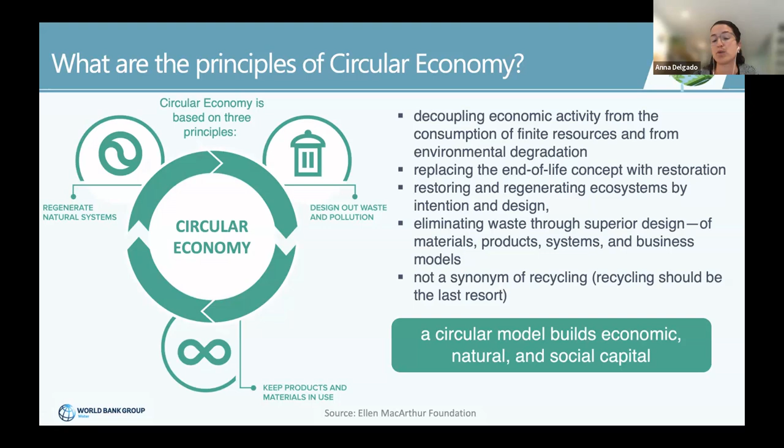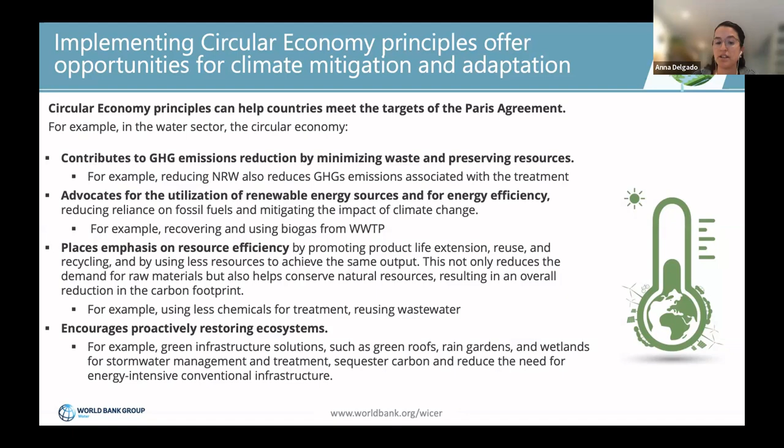There's a lot of text here, but I wanted to highlight that the principles of circular economy are also in line with climate goals and offer opportunity for climate mitigation and adaptation. One example is reducing non-revenue water, which improves resource efficiency and also helps reduce energy needs and therefore greenhouse gas emissions.

Circular economy, we believe, needs to be applied also in the water sector. We can be inspired by the circularity of water in nature. And we think we need to include two important key issues: resilience, and also being inclusive.

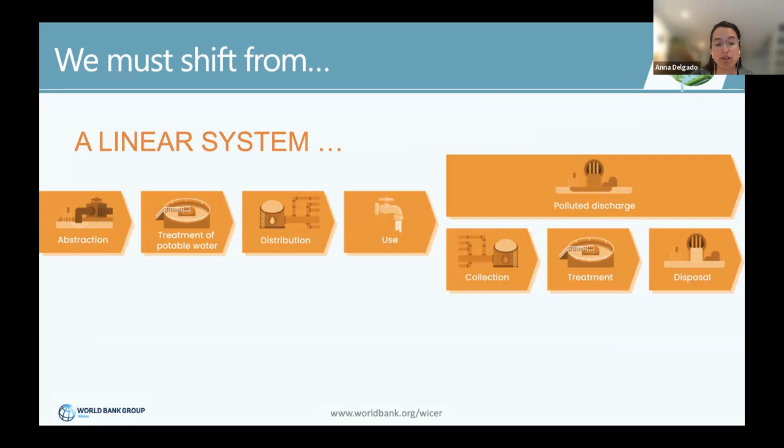As we were having more and more demand from countries to implement those principles, our purpose was to have our own common understanding of how circular principles can be applied in the water sector, and to have a clear framework when supporting countries implement those principles.

The first requisite for us is to value and use to its fullest potential what we already have. This should be a key principle of circular economy. The existing infrastructure can be retrofitted or optimized to increase treatment capacity, provide additional services, or maximize service delivery at a fraction of the cost of new infrastructure.

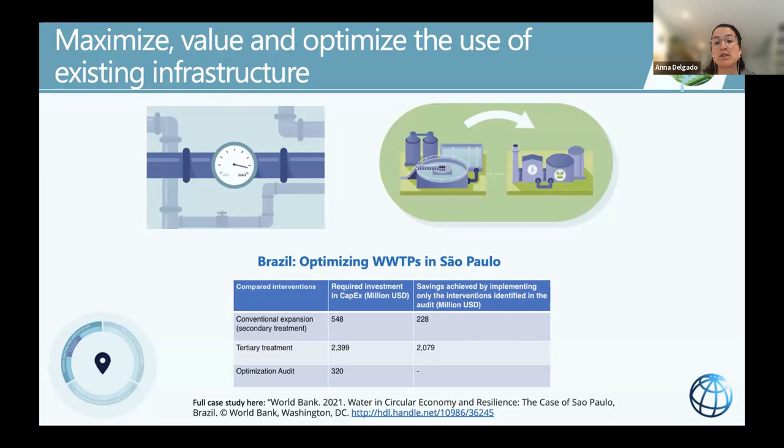I've included a table from a very interesting case in Sao Paulo, also with some support from the World Bank. The utility, instead of investing in tertiary treatment to meet new quality standards, was able to optimize the existing treatment processes individually to increase treatment capacity and quality levels, resulting in huge savings for the utility.

Then key to circular economy are also operations optimized for efficiency, reliability, and performance. It makes no sense, especially in many of the countries we're working in, to start reusing and spend a lot of money on reusing wastewater if we're losing most of it through the pipe. So reducing non-revenue water should be one of the key issues if we want to become circular.

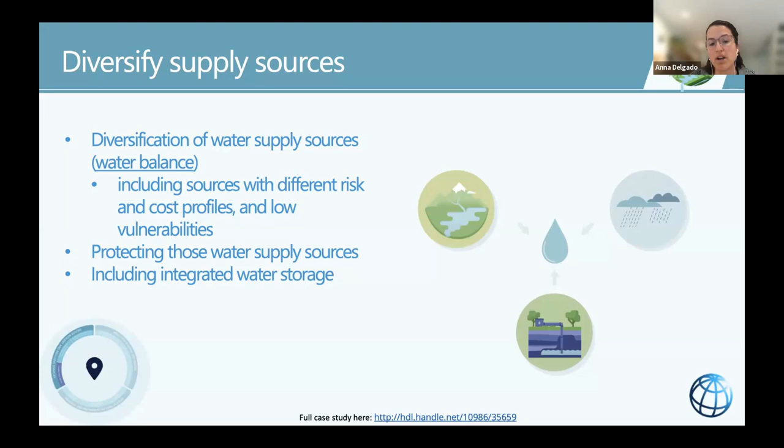We also need to diversify water supply sources, including a portfolio of sources with different risk and cost profiles and low vulnerability to shocks and stresses. That way we can also hedge against risks such as climate risks. And of course, reuse of wastewater and other unconventional sources must be part of this water balance.

Resources can be recovered over the entire water cycle in the form of water, energy, nutrients, and other materials. Ideally, all these recovered resources can provide an additional revenue stream for the utility or reduce operations and maintenance costs, helping the utility become more financially and environmentally sustainable. Resource recovery, as we will see later, can be done at different scales and may include centralized and decentralized solutions. The right solution really needs to depend on the local context.

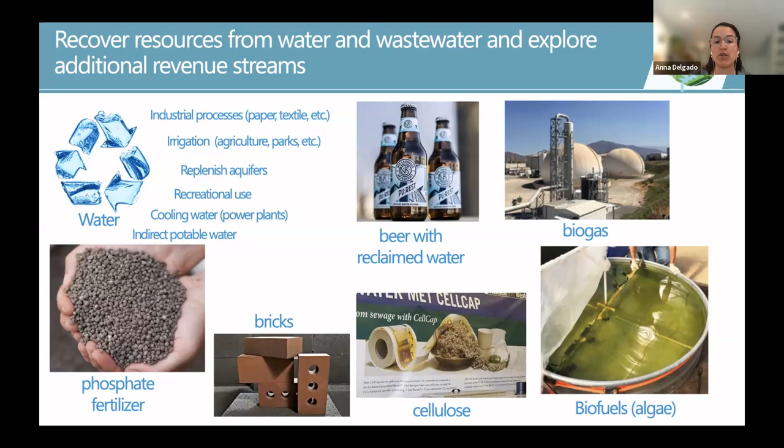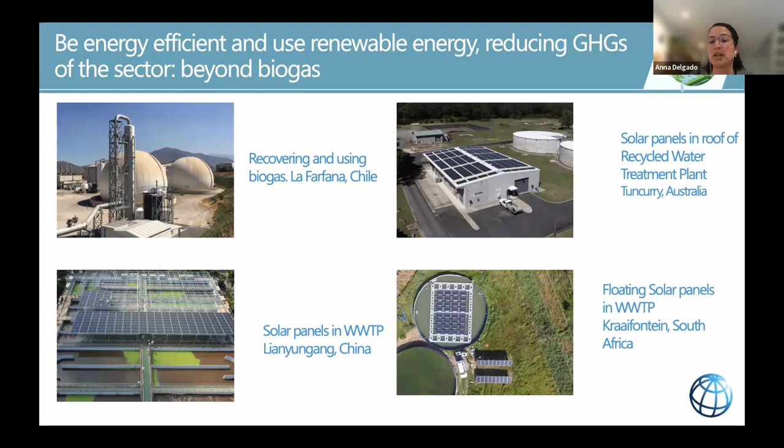Because energy is often the costliest component of water supply and sanitation operating cost, energy efficiency and renewable energy serve both to reduce emissions and also to strengthen the financial performance of the utility. And when we talk about circularity in water, many people think about biogas, but we need to think beyond that. I have included here some examples of solar, but there are many more utilities exploring solar or wind to reduce their climate footprint and to reduce energy costs.

One key issue of becoming circular is also to proactively preserve and regenerate natural systems. For example, we can use nature-based solutions such as constructed wetlands as part of the wastewater treatment. And it is also crucial to manage and recharge our precious aquifers that can also help us adapt to climate change.

There's always key cross-cutting issues that are important factors in the successful adoption of becoming circular. For example, it's very important to manage water demand and decrease water use where possible and become more water efficient. We need to create the right policy, institutional, and regulatory environment to be able to promote those type of solutions. Stakeholder engagement is also key in order to ensure social acceptability, especially when we're talking about reuse.

We believe that implementing circular economy principles also makes economic and financial sense, because as we've documented through our projects and other case studies, we can create additional revenue streams, we can reduce operation and maintenance costs, which then offer a better return on investment. This also can help bring or create innovative business models and bring the private sector to manage those new businesses. And there's also potential to tap into other sectors' financing, such as green or climate bonds, if we're recovering biogas, for example, or environmental impact bonds when we talk about nature-based solutions.

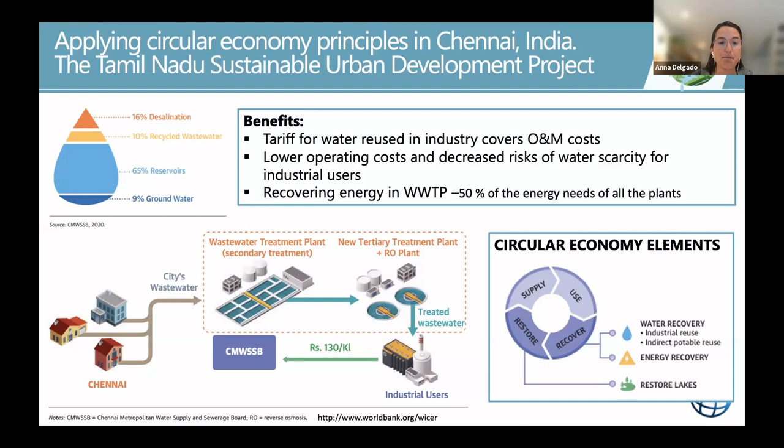And these are also other examples of projects that have circular economy components, and we are receiving more and more requests to implement circular economy principles in water. As part of our initiative, we're also documenting relevant case studies from around the world, which you can find in the websites shown here. And these case studies have also informed the development of our framework.

In the successful case studies, also they leverage the resources recovered to create additional revenue streams, and that way they would make the investment financially sustainable. And finally, at the same time, there always needs to be parallel investment to improve the efficiency of operations of the utility in general.

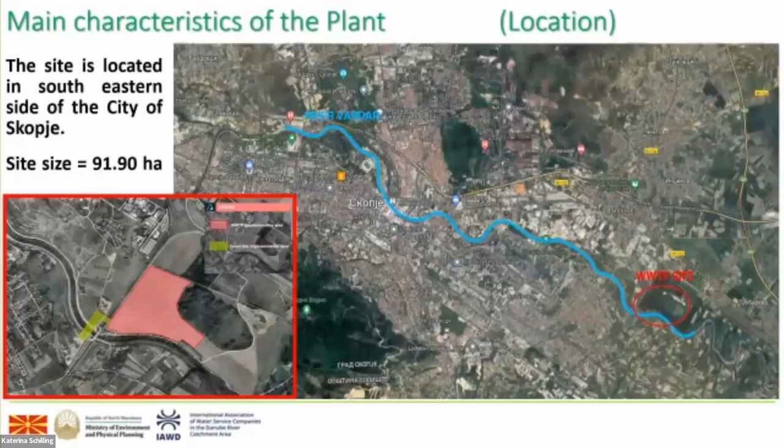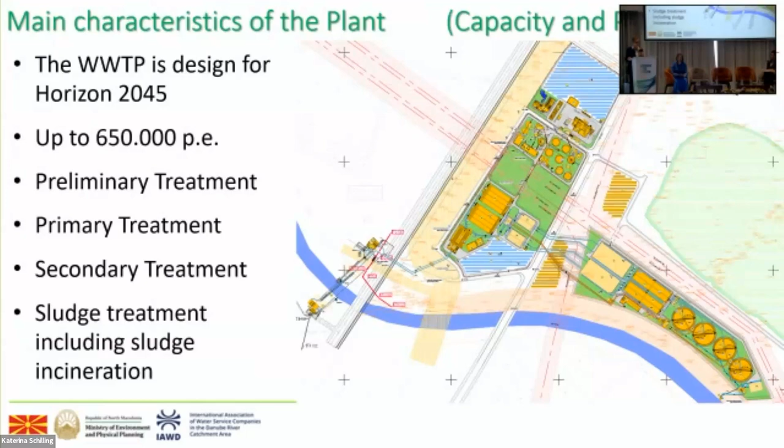Going further, those are the main characteristics of the plant. The horizon is 2045, for 650,000 people equivalent. So we have preliminary treatment, primary treatment, secondary treatment, and at the end, sludge treatment in the incinerator.

So what are the objectives which should be required? What is very important is that our wastewater treatment plant is designed to work in regimes, which means 33% at the beginning. To be honest, we do not have the total load now, and at the end it should be covered 100% of the designed loads.

I want to mention that before constructing the wastewater treatment plant, City of Skopje public enterprise did two amazing jobs. They were financed or granted by EBRD. So we did an inflow infiltration study, performing it for 1 year, and we really gained very interesting figures.

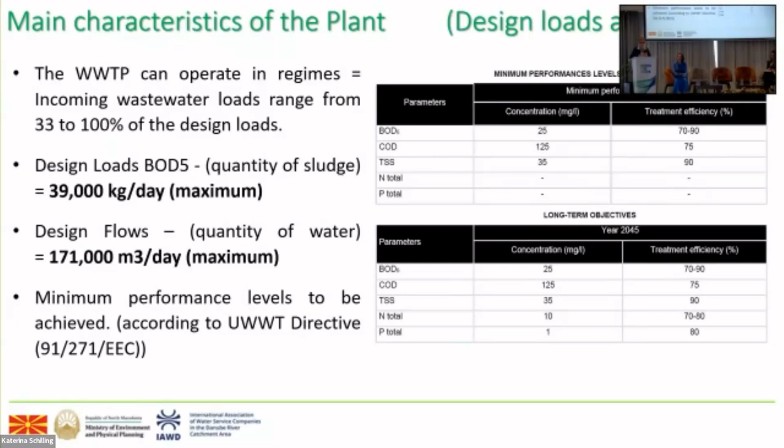But for long-term objectives, we are planning as well to go on to tertiary treatment, so removal of nitrogen and phosphorus of almost 70 to 80%, which is a high number to be set, but I really believe in the company which will construct the wastewater treatment plant, so we will meet the objectives.

Speaking about the numbers and figures, I want to mention that those are already projected numbers. We are still in the phase of implementation. We will have 3 years of construction plus 2 years defect notification period.

We are happy to say it's usually 1 year, but with our efforts we succeeded in gaining 2 years. So we will see what we will set, and whether those objectives will be met. But once again, I hope that we will do it.

So now a little bit focused on the sustainability of the wastewater treatment plant, which we as promoters are really very proud of. At the end, you will see that the wastewater treatment plant Skopje is planned to be 100% sustainable, which means it will cycle its own energy for use. So we'll produce the energy, use the energy, and at the end treat the sludge.

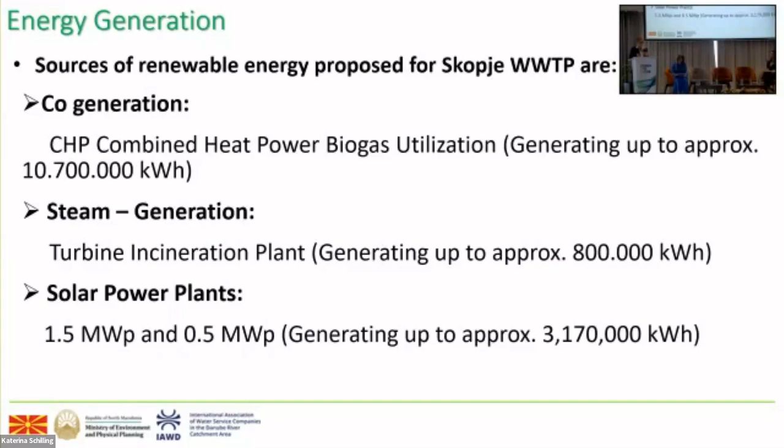Okay, so we will have 3 sources for energy: combined heat and power biogas utilization, which will produce per year almost 10 million kilowatt hours per year; and steam generation, which will produce almost 800,000 kilowatt hours.

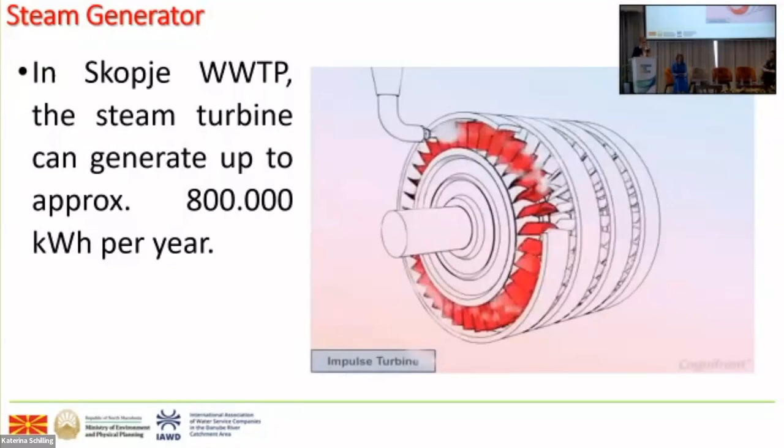And solar panels, which are on an area of almost 9,000 square meters, will produce approximately 3.2 million kilowatt hours per year.

Speaking about summary energy production, if we account the production of the heating power as 10.671 million, production of the steam turbine as 3.1 million, and production of the solar plant as 762,000 kilowatt hours per year, in total it is almost 15 million kilowatt hours per year.

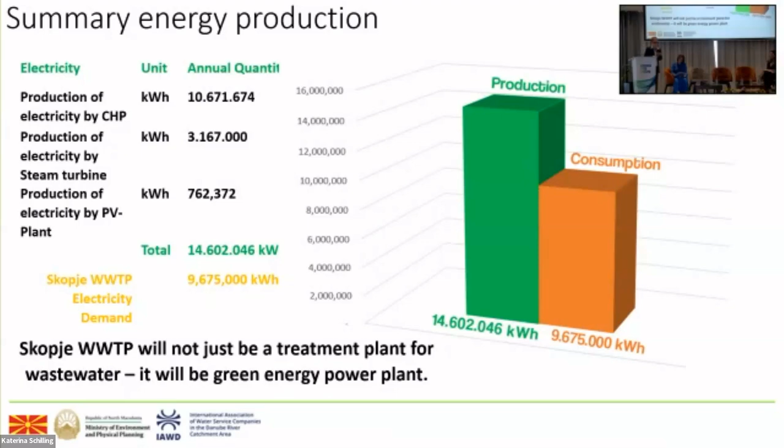But Skopje wastewater treatment plant's demand is almost 10 million kilowatt hours per year, which means that Skopje will not just be a treatment plant for wastewater, it will be a green energy power plant.

I want to mention that the incinerator is really unique in our region, because at the beginning, since there will not be so much sludge to treat, it could be a regional incinerator, which would be another source of funds for the public utility. I think we will work a little on environmental law regarding transport of sludge, so we can become a regional center for incinerating sludge.

What is very important is that at the end, the ash from the sludge is not thrown on the land, but is used as well. It can be used in construction materials like cement and concrete production, in road construction for asphalt and road base, as a soil amendment and fertilizer, and in the end, it can be used for metal recovery.

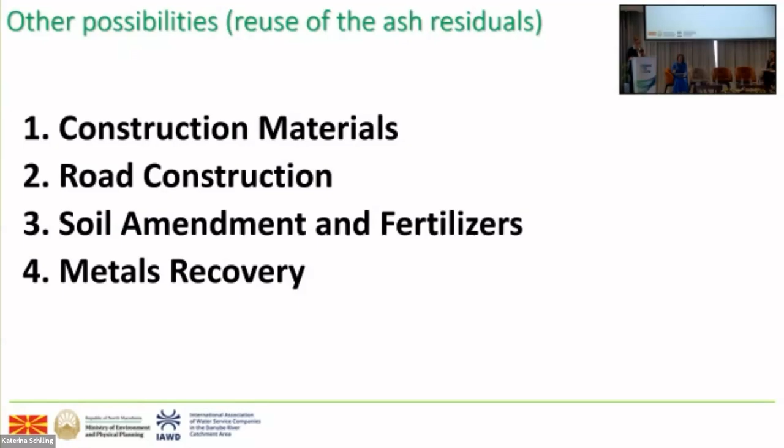So we will use the ash. We will not throw it away, even the sludge, we will not throw it on the land. So we will have a really sustainable, very efficient wastewater plant, which is very innovative, high-tech, and a green asset.

And at the end, I want to thank a lot, first, the government which succeeded in gaining the loan, the banks who were very supportive during the whole process, WBIF, and the EU for getting us the grant.

I want to thank a lot the young professionals, my team in PIU, who are very enthusiastic and supportive. Many of them during the process had their master thesis on the wastewater treatment plant, which is really amazing. I'm proud of them.

Thanks to all stakeholders. Even though sometimes we had difficulties during negotiations and coordination, I believe we will receive a really good project. Thank you.

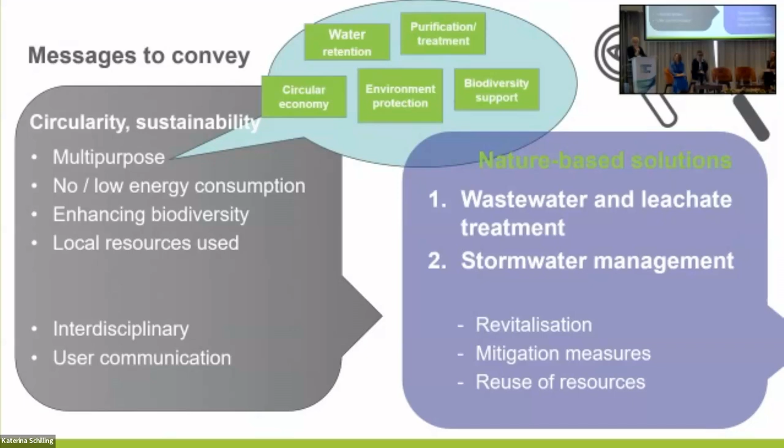Starting with constructed wetlands, mentioned already today: for those who don't know the procedure, a constructed wetland for wastewater treatment is a simple operation. Wastewater coming from, for example, a village is collected in a sedimentation tank and then runs through the substrate, through different forms of gravel, through the roots of plants, and in the end exits the system purified. The substrate serves as filtration and adsorption of pollutants, acting as a base for the plants we are planting and a surface for microorganisms, which, like in conventional wastewater treatment plants, are the main source of treatment.

Plants can be different varieties, usually the local varieties, and there are areas for microorganisms, and they also induce additional oxygen to speed up the process.

The solution is useful for entire villages. This is one example for a village of 500 population units, or up to almost 2,000 population units, and of course bigger if the area is available. So this is an area-intensive technology.

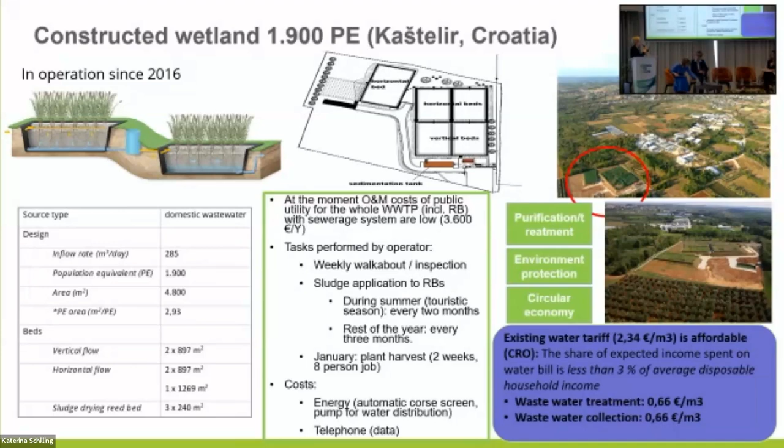On resource efficiency, I would like to point out that water reuse started in 2022. There was a huge drought in the region. The wastewater treatment plant has vines and orchards around it, so this water was already suitable to reuse directly from the collecting tank.

The sludge reuse is also part of the system, so this is a resource-efficient place, and the resource loop is present. All the sludge is collected in the sludge drying reed bed. This is a little bit different than a constructed wetland, but it's placed here too.

It's just one small reed bed. Initially there were 3 planned, but only one was realized because it's a Mediterranean climate, and it works really well with just one. In the end, we hope that when the sludge drying reed bed is filled, this material will be reused in agriculture. If not, other resource-efficient solutions will be found.

I also mentioned that biomass is harvested every year. This is a necessary process, and it is reused in agriculture after it is composted.

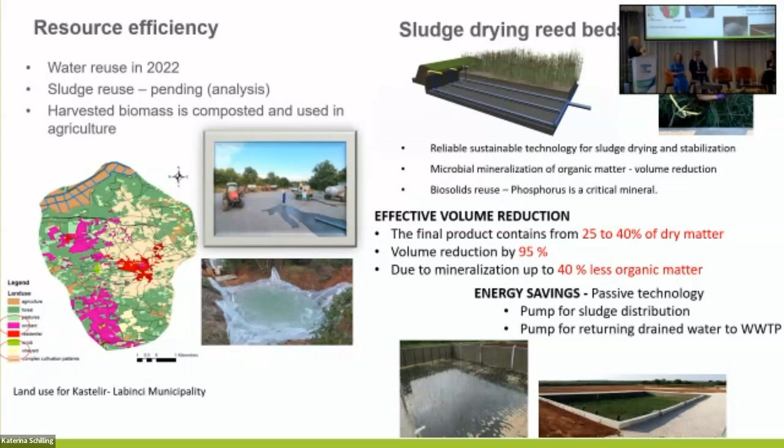Treatment wetlands in the Western Balkan region, as far as we can gather, are increasingly in demand. For example, in Croatia there are currently a lot of sludge drying reed beds being placed alongside conventional methods of wastewater treatment. This will enable the country to actually think about a sludge reuse strategy in the following years, and it will buy them at least 10 or more years of time. But these sludge drying reed beds are reusable even after this first filling, and reusing the material will be done.

Also in Montenegro, there are several locations where either a constructed wetland, sludge drying reed bed, or leachate treatment is performed using nature-based solutions, because they have many protected areas. These locations are next to rivers and lakes, and this is why the decision to use this technology was made.

There are also some locations in North Macedonia, not just in Skopje but also some smaller points we're happy with. This is a combination of a constructed wetland and sludge drying reed beds, so we are tackling all the pollution sources in one spot.

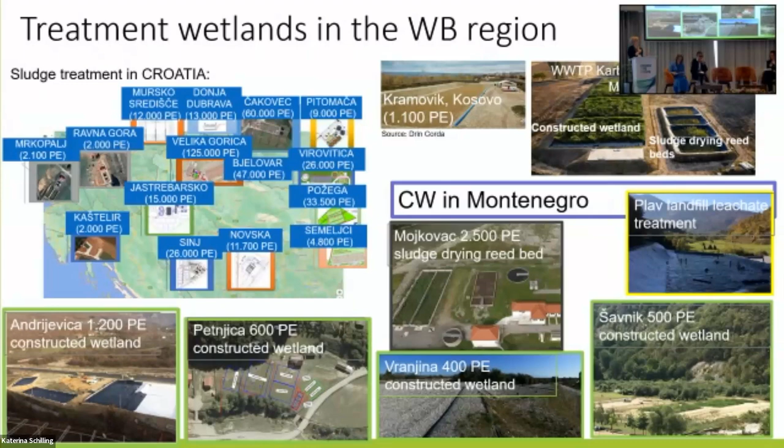And even in Kosovo, things are moving well. This is the first constructed wetland from Kosovo. It's not from our design, but I'm mentioning it nevertheless. So it's a known technology.

Nature-based solutions are quite flexible, and there are many solutions available. There's quite a lot of information about that on the internet. I'm pointing out one latest website where they present all the different solutions according to the pollution load, the surface you have, the availability of area, geography, and pollution loads. So the solutions can really vary, but you need in the end a skilled designer to design the solutions, because the devil really is in the details, like in any case.

We can have really different open areas, closed areas, a French system combining sludge and wastewater treatment in one basin, etc. I'm mentioning also the zero leachate treatment. This will consume a lot of area, but nevertheless it will enable the business model of charging for the treatment of wastewater and also producing biomass. This is a solution quite known in Scandinavia and other developing countries like India, for example.

This is a case I would like to present also from Slovenia. We started like 30 years ago, and this was one of the first locations of wastewater treatment for a village with a population of 250 initially. But during the years, population grew. This became a protected area.

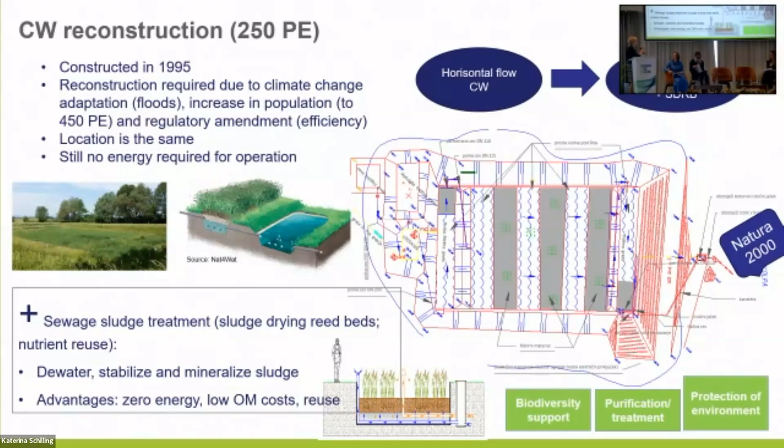And there is a Natura 2000 site right next to this, so this increased efficiency will also be observed there. So we are managing not just purification and treatment, but also protection of the environment and biodiversity support.

Stormwater management: some parts of the process of wastewater treatment in constructed wetlands can also be used in other locations and for other purposes, like stormwater management. This is a case of rain gardens in Ljubljana. Urban areas are particularly affected because of climate change. There will be a lot of heavy rains during the summer, and all this water has to be managed in a way. A rain garden is like a natural basin, a vertical filter, and plants will be used to support biodiversity and also to retain water during the summer to cool the area, etc.

This is the case that we are working on. There will be two rain gardens. One will be for purifying the water from a parking area nearby, and the other will be to retain, detain, and purify stormwater from the roof.

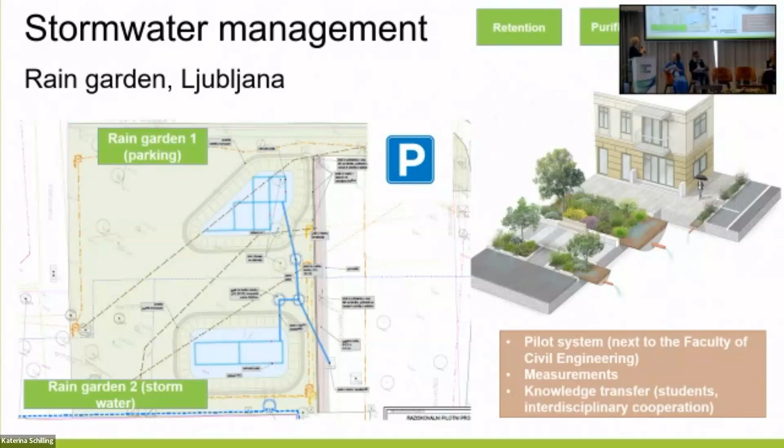There is another interesting case which stems from urbanization. An investor decided to build a new compound of 30 houses close to the Natura 2000 protected area, so there was a demand that the stormwater is collected and treated before it's released into the Natura 2000 area. What we will do is use this part of the channel, make it a two-stage drainage ditch empowered with plants, and then here we will do the detention basin, replacing the wet meadow. So this is a mitigation meadow for the lost habitat.

And there will be another small pond, a retention basin for habitat creation. Before the water is released into the Natura 2000 area, here we will do the filtration treatment so the water seeps through and is purified, finally being released into nature.

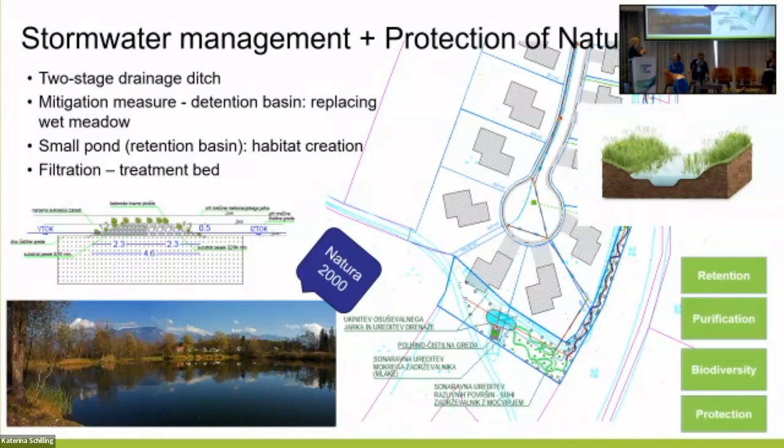Stormwater management in an industrial park is also one exciting case. You have heard today already about the polluter pay principle. This is stormwater retention which is polluted because of the waste processing industry directly on the brink of this industrial park that is close to the Natura 2000 site.

So what we will do is make this stormwater retention basin an open constructed wetland, and the water will come through here, run below the floating islands as the first part of the process, run through the part with the helophyte plants, and finally seep through the filtration basin and into the Natura 2000 area.

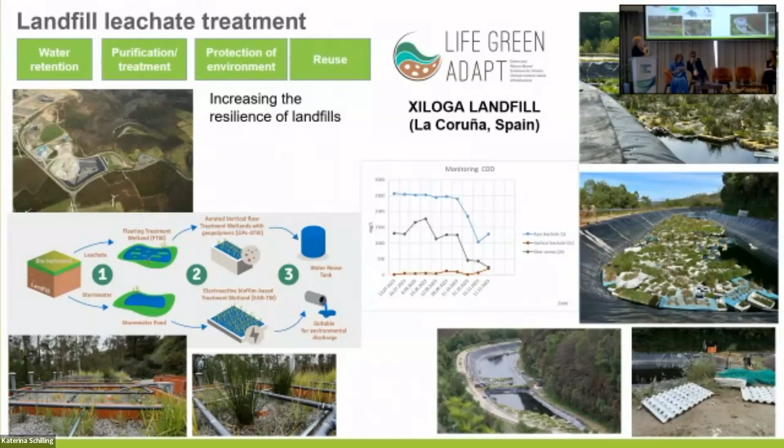We can also treat landfill leachate with plants using this stormwater, using treatment islands. So finally, I think the key messages I would like to give are that nature-based solutions are flexible. They can be installed locally. They can address different pollution sources, and they can also be managed locally. Thank you very much for your attention, and I remain for any questions.

How can I summarize this parade of great examples on wastewater treatment plants, not only for wastewater but also for stormwater, leachate from waste, and Natura 2000, reminding ourselves of the constraints and requirements from the European Union. These are great examples for countries like Montenegro, North Macedonia, Kosovo, Albania, Bosnia-Herzegovina, Serbia, with populations ranging from approximately 600,000 to 6.6 million inhabitants. As we heard this morning from Michel at DG Environment, after 30 years the Council of Europe has reached agreement on recast of the urban wastewater treatment directive. This agreement mandates secondary treatment for all agglomerations of 1,000 population equivalent and above.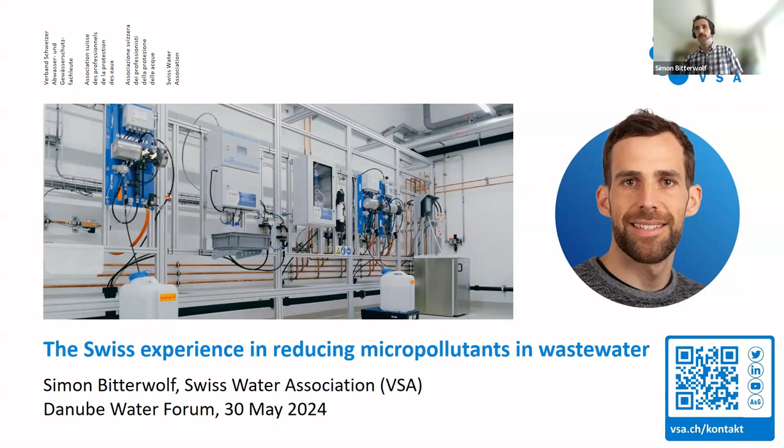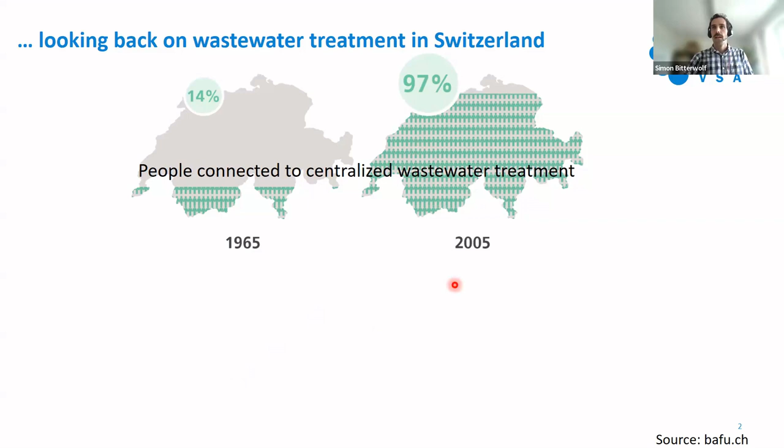In the same time, the development of wastewater treatment has been constantly and really fast. First, there was only a mechanical treatment that is not even displayed here in my time span. And in 1917, the first biological wastewater treatment plant was built for carbon elimination. That is like the first step here. Later came the elimination of phosphorus and nitrogen.

This, by the way, is where Switzerland still lags far behind its European neighbors. That is a little side note as an example that not everything is perfect in Switzerland. So a few years ago or decades, one may have thought that by now the waters would be clean already. Well, that was before we knew about micropollutants. These are residues of pharmaceuticals, chemicals, and so on, and they are not sufficiently treated so far, and they have a proven negative impact on water ecology.

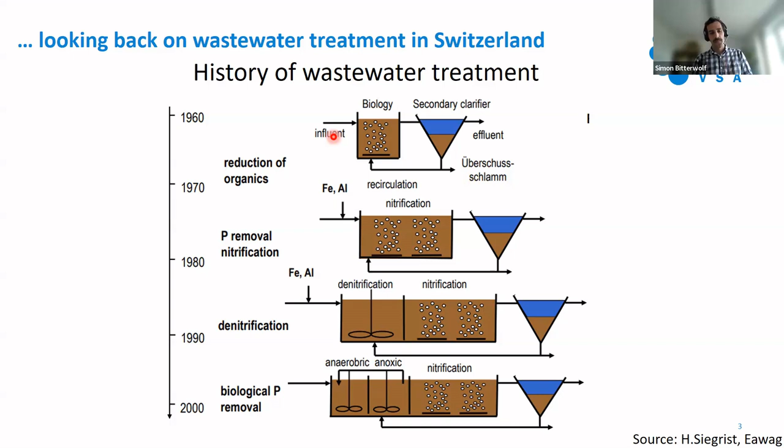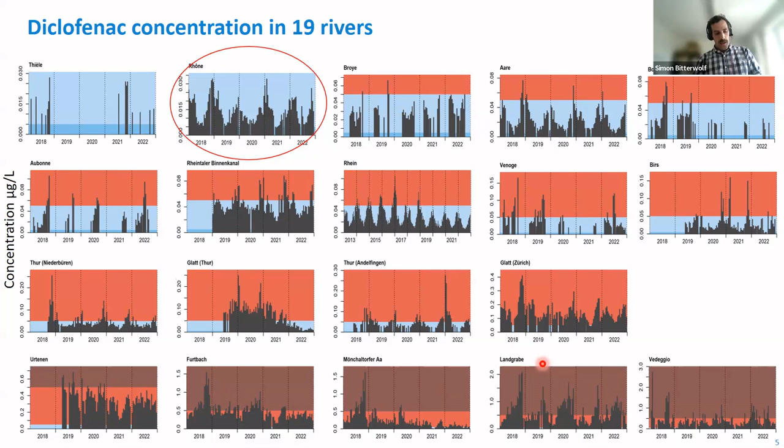And this pollution with micropollutants like diclofenac shown here is mostly originating from wastewater treatment plants. The limit values are exceeded depending on the flow rate and the share of cleaned wastewater in the rivers. So usually when there's a bigger river, we have less of a problem. In the smaller rivers, we have a bigger problem. But all in all, we have to say that we still have got a problem here.

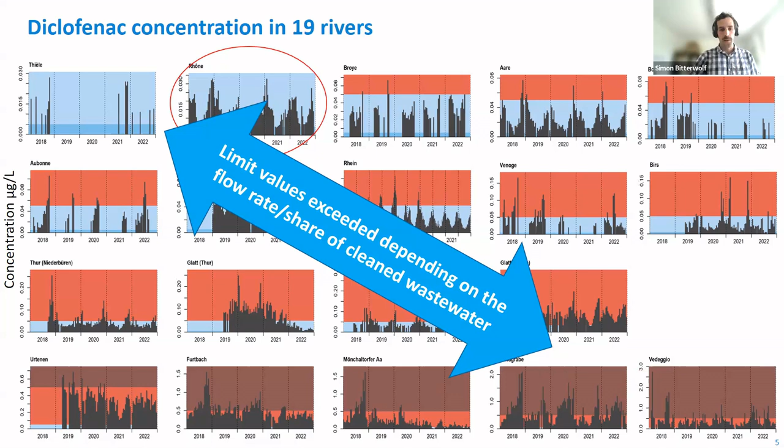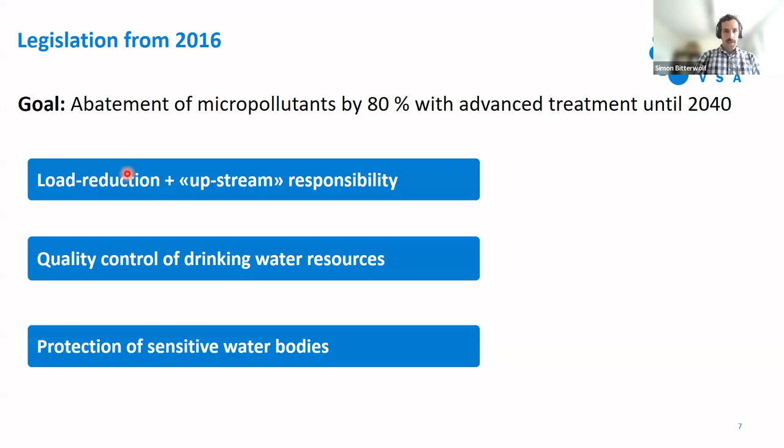So what does this Water Protection Act from 2016 actually say? It says that until 2040, about 130 of a total of 700 treatment plants in Switzerland must reduce micropollutants in their wastewater by a factor of 80%. Because these are mostly the bigger plants, we can by that reach a population of 70% of Switzerland. The criteria by which the plants are chosen are, first, plants with more than 80,000 inhabitants. By this, we can already reach a big proportion of the population and we have a huge load reduction.

The second criteria is the quality control for drinking water resources. So we do choose plants that discharge into lakes or in special hydrogeological situations. And the last criteria is the protection of sensitive water bodies, and that applies to smaller plants that contribute more than 10% of water to the river they discharge. And these are mostly the red area parts that you saw on the previous slide.

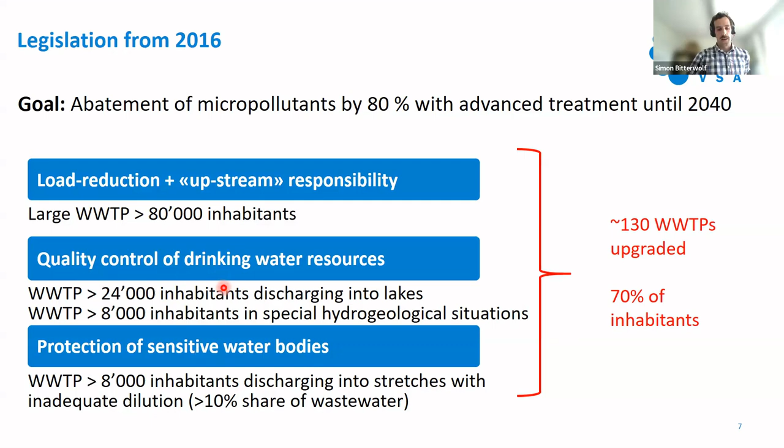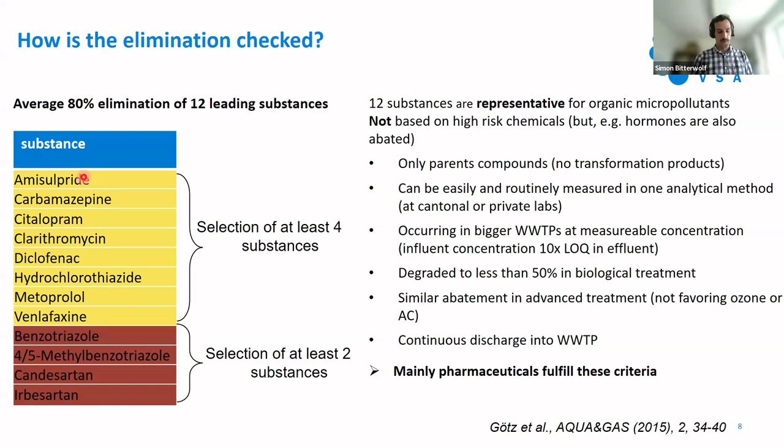The costs for this upgrade are pretty high, about 1.2 billion euro. So how does the funding work?

These 1.2 billion euro have to be paid by the polluters, and that are the wastewater treatment plants A, B, and C. So at the end, all of us, the citizens, because all these wastewater treatment plants have to pay 10 euro per person per year to a fund. And out of this fund, we will pay back the upgrade investment costs of certain treatment plants. By the way, this 10 euro per person per year equals half a pizza margherita in Switzerland, but with this half pizza, we probably won't even be sated.

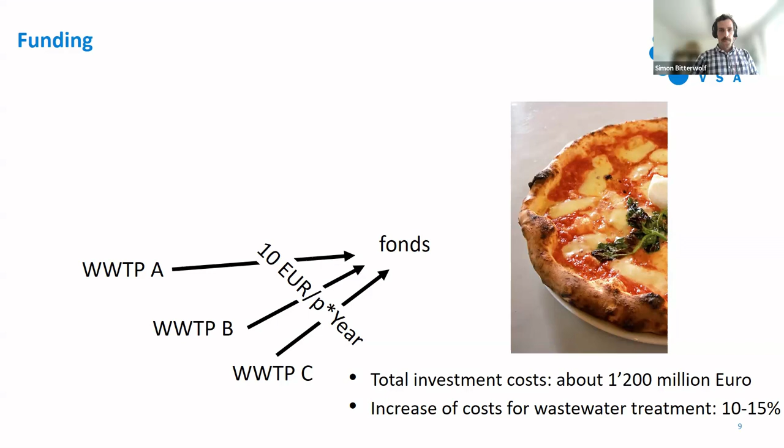Once a treatment plant has finished its upgrade, it does not have to pay this 10 euro per person per year anymore, but they have to pay the operational cost of the treatment. This is also more or less 10 euro, as we have learned in the last years. So if the wastewater treatment plant gets the operation cost below 10 euro per person per year, then they can actually save some money, while the other wastewater treatment plants still have to pay this 10 euro.

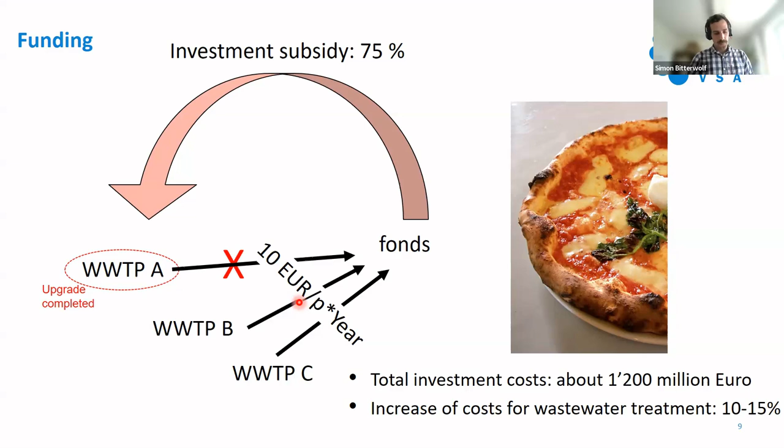Now, a brief excursion into process engineering. How do we even treat the micropollutants in wastewater? At the beginning, like in 2016, there was almost no experience with the processes. There were some studies, some pilot tests, and some plants had to be the first movers, trying processes that we learned from and could then apply to future projects.

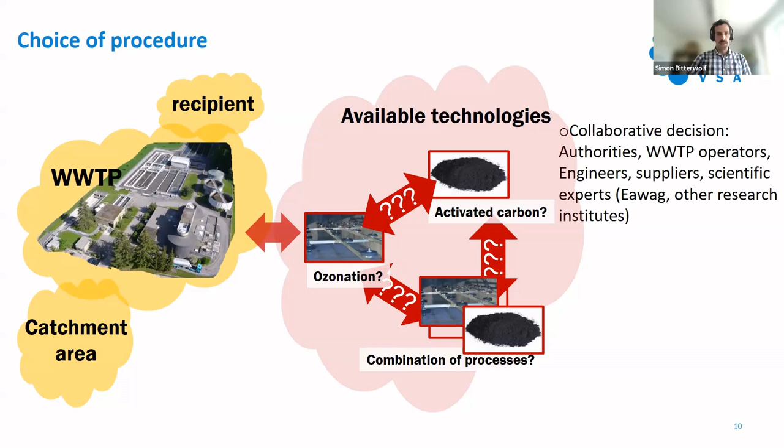Meanwhile, 3 main processes have been established: ozonation, activated carbon, either with powder activated carbon or granular activated carbon, or a combination of those processes. Which process is best depends on the individual treatment plant, and usually we decide this in a pre-study, taking into consideration many aspects, not least the catchment area and the recipient, like river or lake. The decisions are usually made in collaboration with operators of the plants, the authorities, engineers, and research, and there's us, the Swiss Water Association, who tries to link all these stakeholders.

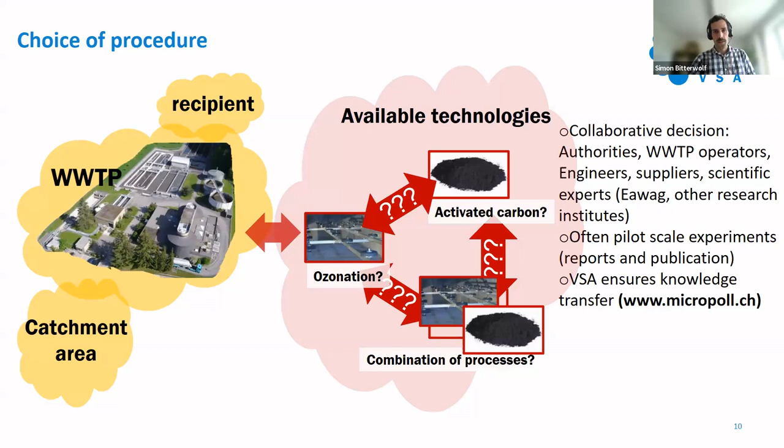At the moment, we already have 23 plants in operation with removal of micropollutants, and there are many more in planning or even already under construction. All of them you can see on this small map here as colored dots, each color representing a different process. The many more black dots you see are the rest of the plants that are not upgraded yet. So far, in this graph, 9 plants run with ozonation, 9 plants run with powder activated carbon,

and then there's some process combinations and some granular activated carbon, whereas in the last years there has been a development towards more granular activated carbon instead of powder activated carbon that is not displayed here yet. On the right figure, you can see the share of connected people to one of these processes - we have more people connected to ozonation because this process is usually used on the bigger plants.

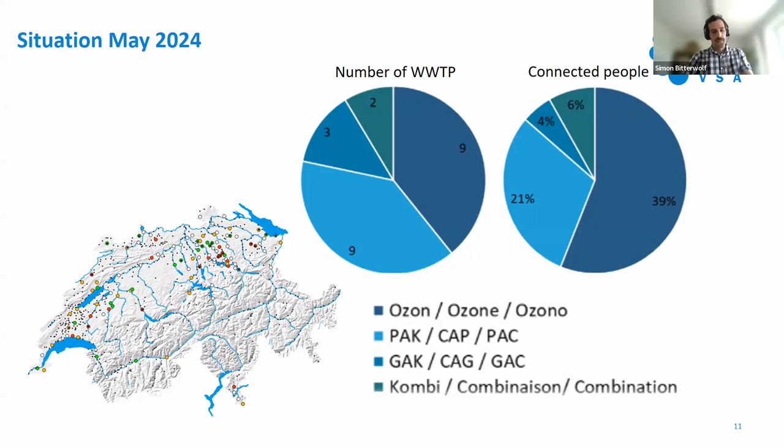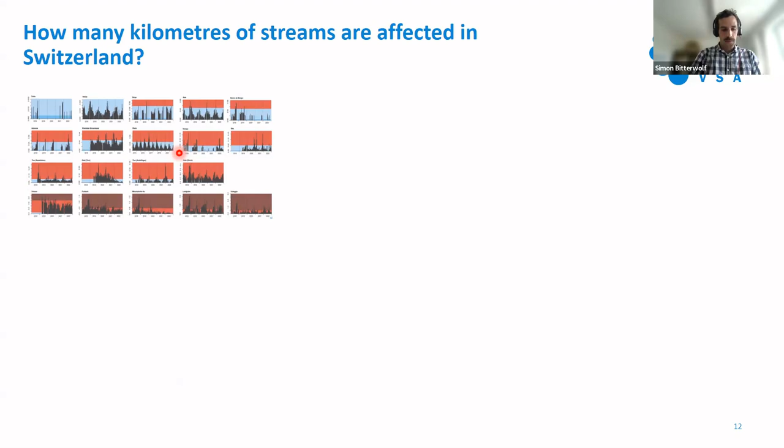Now, the final question is: is this upgrade enough to avoid pollution of the rivers? We're now coming back to the slide from before that you should remember, just displayed here very small. And if you apply these graphs to the map of Switzerland and colorize all the rivers according to their pollution with micropollutants like diclofenac, we can see the following.

This is actually a very recent study that I just showed, and this is the basis for a further tightening of the Water Protection Act. Because since 2020, we are working on a law claim that says all wastewater treatment plants whose discharges result in limit values being exceeded must implement measures to eliminate micropollutants.

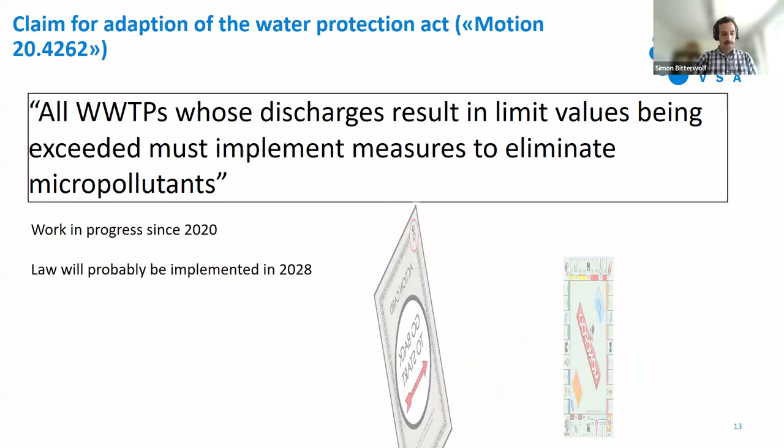So does this mean we have to go back to start? Somehow, yes, but we are not totally new at the start because we already have a lot of knowledge and success in our backpack.

To sum up, what has helped us getting here where we are now? For sure, it was a strong collaboration among researchers, regulators, and practitioners. The financial planning was accepted by all, mostly because the financial risk was not to be carried by the operators.

Also, we learned that the measurement of the 12 leading substances to evaluate treatment has proven very efficient. And all in all, there was a big willingness to proactively invest towards a clean and more sustainable environment. And last but not least, the Swiss Water Association, the VSA platform, supports all stakeholders involved, and we were an important link to get the knowledge from research into practice.

However, of course, there were and still are some boundaries. We still have knowledge gaps, like remaining uncertainties, so research is still ongoing. Also, we reflect about our priorities and think about taking care of bad water quality regarding conventional parameters like nitrogen, also because for micropollutant removal, a well-performing wastewater treatment plant for these conventional parameters is absolutely necessary. And then there's always the question if we should rather spend the money on something else.

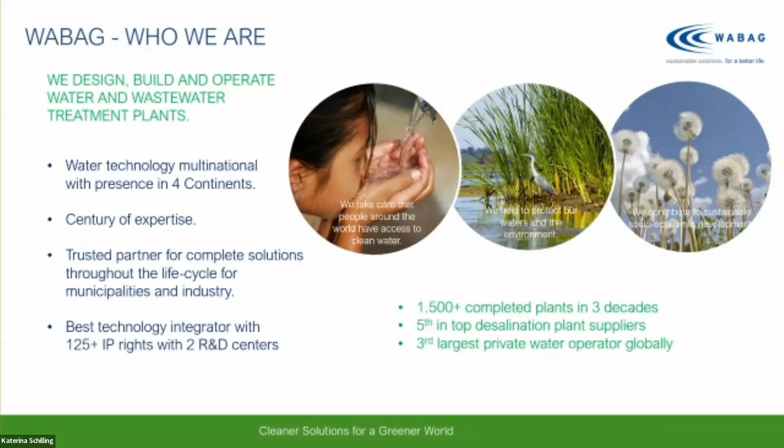Maybe not everybody of you knows us. WABAG is a pure water service provider. We are this year 100 years old, and we are present on 4 different continents, and we have our own technologies. We are multinational, on 4 continents in 25 countries, and we provide solutions focusing on conservation, optimization, recycling, reuse. We call it the reclamation of water, to address all the challenges we have in our world at the moment.

For this, we have different technologies for all kinds of applications: for water treatment, for drinking water, industrial water, also desalination, and what is the topic for today, water reclamation. Also on the wastewater side for municipal and industrial applications, sludge treatment, and also industrial water recycling and reclamation.

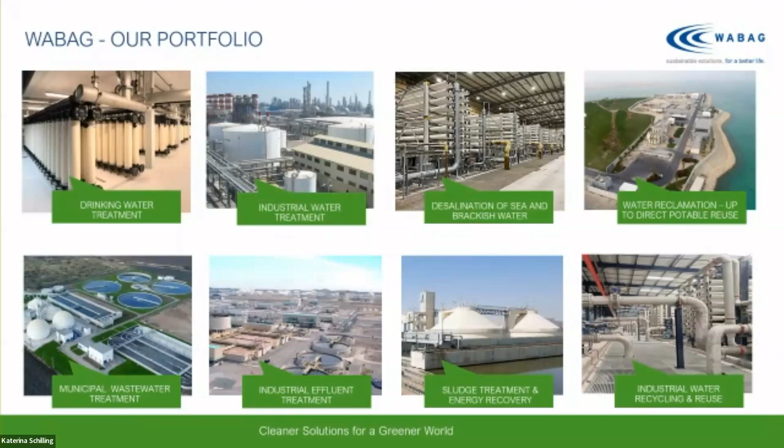If we look a little bit at what we're speaking about, we have a lot of water on our planet, but only 3% of it is fresh water. The rest is captured in oceans and salty water. Out of this 3%, almost 2/3 are captured in glaciers and ice caps on the poles. So only a tiny fraction, about 1%, we can use directly without huge investments or huge energy, like for desalination, which is highly costly and needs a lot of high technology to do it.

Out of this 1%, almost 1/3 is in groundwater, and in some areas it's not really easily accessible. So we speak about 0.4%, which is surface water that we can easily access. 2/3 of that is in lakes, some is in the soil. So what we can use is in lakes and rivers, and sometimes also some part of the atmospheric water.

So we are speaking really about a tiny fraction of all the water what we have. Therefore, it's so important that we take care of our water and use it more than one time, and reuse is really a big challenge.

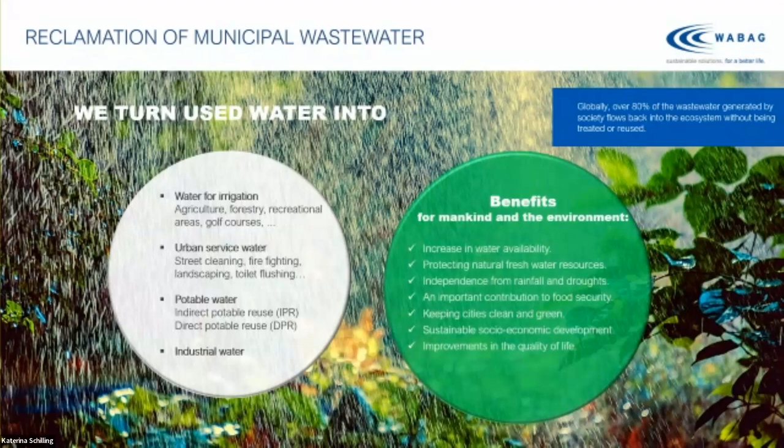If we speak about reuse, we have to think also that 80% of the wastewater worldwide is not treated at all at the moment, and is discharged in lakes and rivers without any treatment. So what we can do is use the latest technology to produce water for irrigation, for urban service water, for example for firefighting water, and landscaping also, or even if cities already have a two-way system, we can use water for toilet flushing instead of drinking water for these kinds of things, or then turn wastewater again into potable water.

Here we have two different possibilities: indirect potable water and direct potable water. And of course also for industry, which is also using a lot of water.

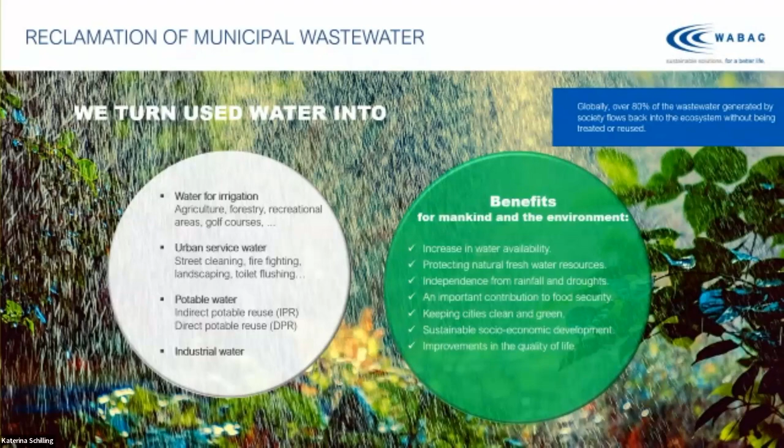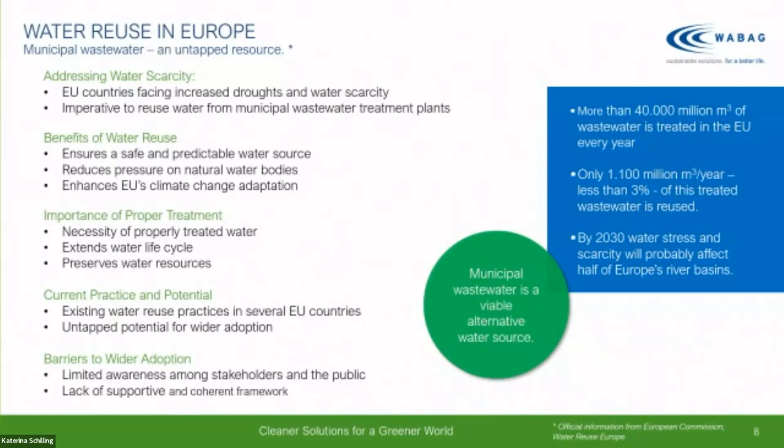By 2030, this problem will increase, and most probably, some studies say, will affect half of Europe's river basins. Therefore it's very important that we do something on the reuse side. Especially municipal wastewater is very easy to treat and can very easily be reused for irrigation.

What is the regulation, what we have now on the European side? The European Union released this water reuse regulation in the year 2020, and this has to be implemented by the member states until 2023. Some of the states did not follow this regulation up to now.

So how are we here in Romania with this regulation? The regulation went through the parliament in December '23. For the moment, we are missing the methodology, how we can implement and how we have to implement this regulation. Romania is producing around 5 million cubic meters of wastewater every day, and this wastewater is treated in more than 600 plants.

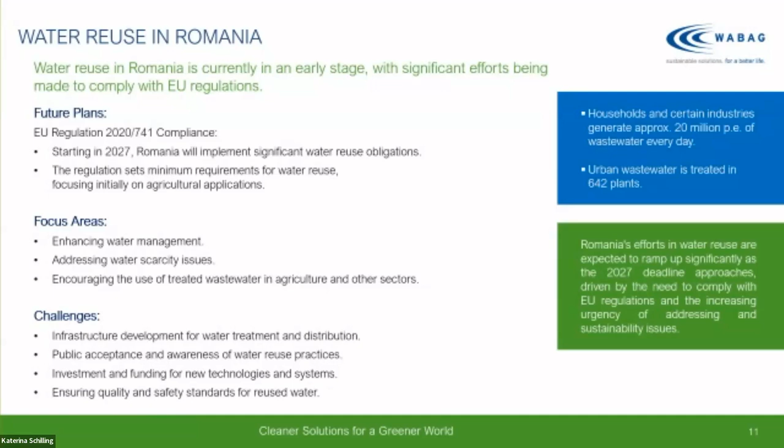Which technologies do we have? Technologies are available, different technologies for different applications. In general, multi-barrier systems, advanced multi-barrier systems, what we can apply for drinking water, direct drinking water or indirect, where the water is going first into a natural basin for further treatment, or industrial water. And for what we're speaking today, urban water or irrigation water, here an additional treatment step with a filtration system and a disinfection system is used.

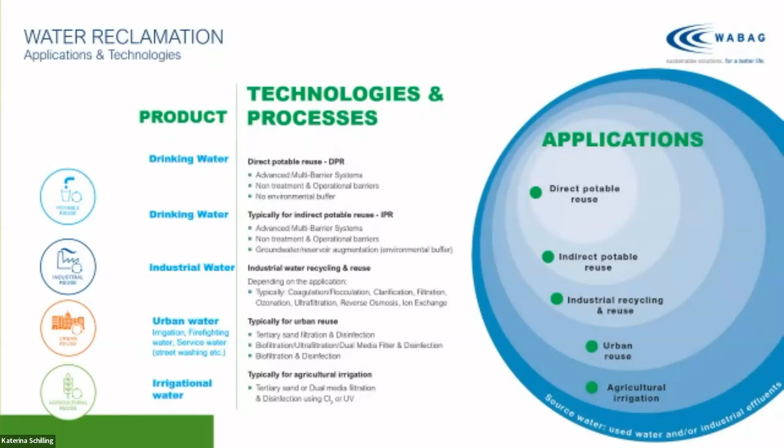So coming to our case study from Madinaty. Madinaty is a city east of Cairo. It's a city direct from the drawing board. It's not a grown city. It spans, at the end when it's finally built up 100%, over 33 square kilometers.

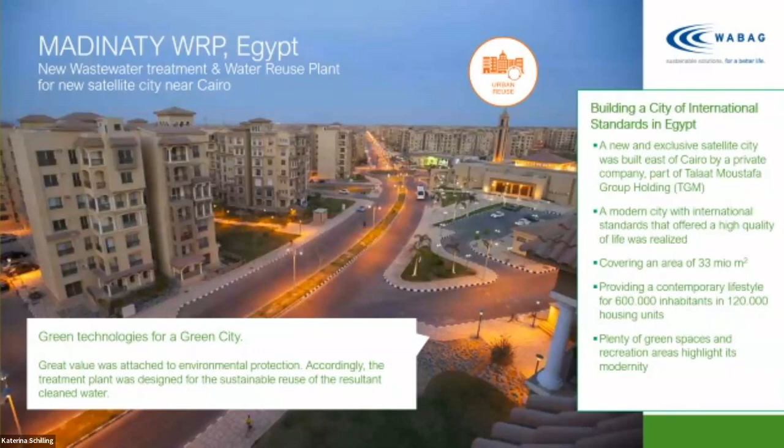And will inhabit 600,000 people with a lot of green spaces between the house units. This is a unique plan, especially in the Cairo area. There are not too many green spaces, and it will provide 120,000 housing units for approximately 600,000 people on the east side of Cairo, close to New Cairo, which was also built recently.

The Madinaty project was planned and financed by Egyptian visionary Mr. Talaat Moustafa with his group and some additional sponsors from the Middle East. It's the first city which is privately founded in the area, and also the wastewater treatment plant is fully privately funded.

It's designed to be built in stages because the city is growing slowly, so the wastewater treatment plant grows with the needs of the city. At the moment, there are 2 stages out of 4 finalized. Stage 1 went into operation in 2018 and stage 2 in 2022. Both stages were built by WABAG in a DBO or EP plus O&M model, so we are also operating the plant since that time.

The water produced here in the wastewater treatment plant is 100% reused for irrigation in Madinaty city, to water the green spaces between the houses. Each stage of this plant is designed for 40,000 cubic meters per day. It's a standard wastewater treatment for the beginning, with additional treatment steps at the end using a rapid sand filter filtration and chlorination disinfection to use it directly for irrigation purposes.

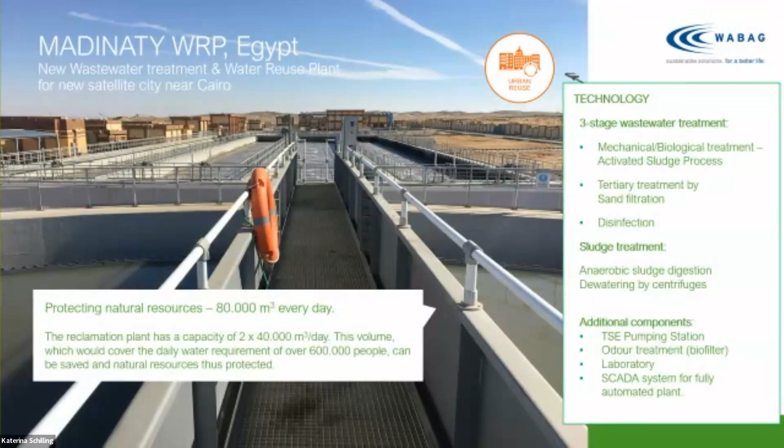There's also dewatering of the produced sludge. Of course we have sludge there, as in every wastewater treatment plant. The sludge is first neutralized in anaerobic digesters, and afterwards dewatered with centrifuges.

The similar thing happens on the sludge line. The sludge is digested in anaerobic digestion and then dewatered with a centrifuge. At the moment the sludge is disposed of, but it could be used in agriculture as a fertilizer.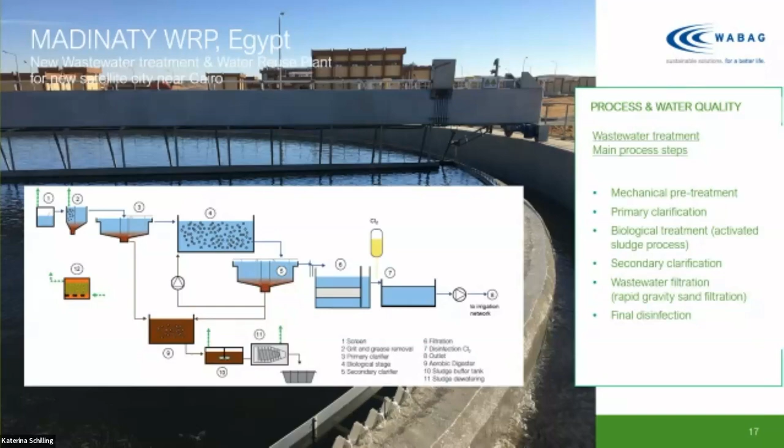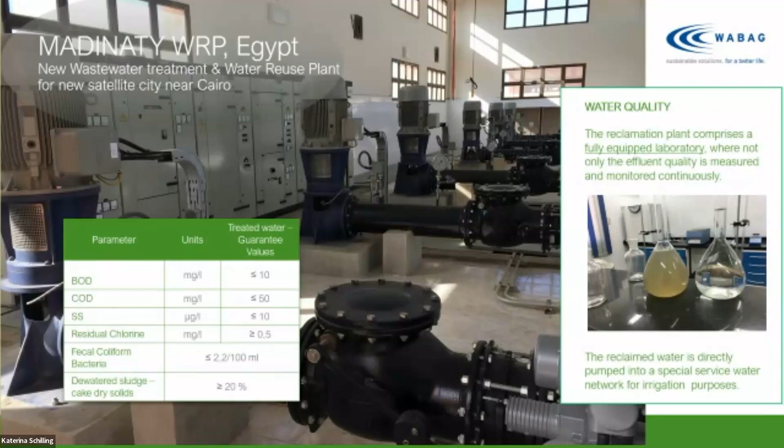We received a big award for this plant from the Energy Globe Award, because the biogas produced in the digesters is used to produce energy to run the plant. It's not 100% self-sufficient because the sludge is not enough to produce all the necessary energy, but more than half of the energy is produced by the plant itself.

Advantage Austria handed over this award to our Egyptian colleagues last year in 2023. We have some other examples of reuse plants, mainly for irrigation and agriculture, but also for industrial reuse, which are already implemented and working worldwide.

At the end of my presentation, some awards from international publications like GWI, recognizing our initiatives in water reuse and our water reuse technologies.

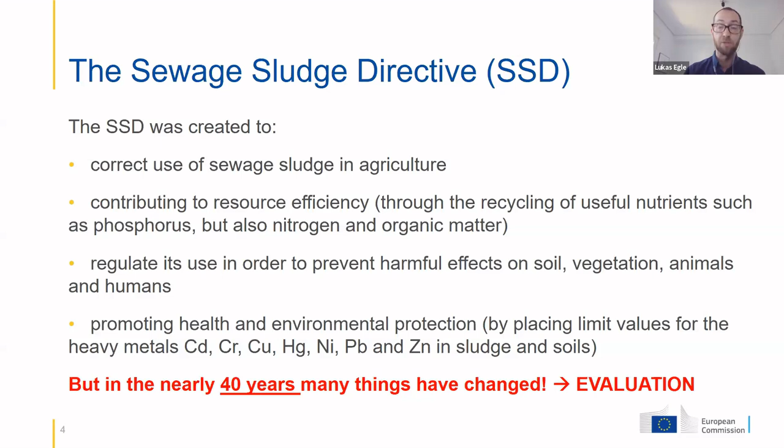And for this, to also have a potential revision of the sewage sludge directive, an evaluation was done by our colleagues from DG Environment. I want to really go quickly through it, have some selected points to present to you. What was their conclusion or what was their finding?

So at the moment, we are applying 7 to 8 million tons of sewage sludge per year in agriculture. This is still one of the main routes of sewage sludge. This is quite constant over the years, but we have a high fluctuation between the member states. Some member states have 90% of sewage sludge applied on agricultural land, and some member states only 20%. So it's not a very homogeneous picture.

But agriculture use is the cheapest way for sludge disposal, still is, and this is beneficial for the operators of the treatment plant and for sure for the farmers, because they get a very cheap nutrient source in comparison, for example, to mineral fertilizer. What they also saw in the study is a decreasing level of heavy metals in the sewage sludge since the implementation of the sludge directive.

The question is whether this is coming from the directive itself or from some other regulation that came into place, like for example the indirect discharge regulation or bans on specific metals, like for example amalgam at dentist offices. So there were some regulations in place that could affect the heavy metals or other substances in the sewage sludge.

And what I already mentioned before, in the meantime member states already adopted more stringent requirements to have more environmental protection in their countries. But what they also found in their study is that we have limited information.

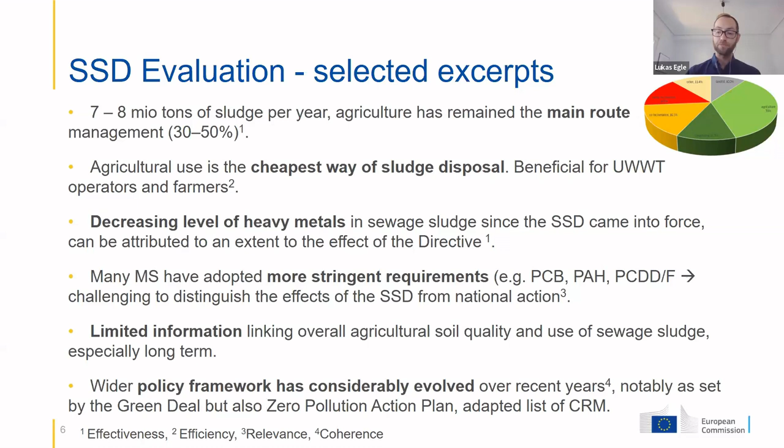And also the policy frameworks have evolved considerably over recent years. We have the Green Deal to promote recycling, promote recovery. We have zero pollution action plans. We have adapted lists also on critical raw materials, for example, to promote the recovery of phosphorus and valuable nutrients even more.

And I want to come to the presentation of our feasibility study. So what was the objective? We want to bring forward some preliminary assessment of different policy options for a possible potential review of the sewage sludge directive in the future.

What did we do? We developed a baseline scenario for the year 2050 and developed 2 policy options. We go into detail on the next slide.

I want to focus here already that phosphorus, when we talk about sewage sludge and recycling, is the most valuable and critical nutrient. We see it also on the list for critical raw materials. We also have organic matter and nitrogen, but they are less important when we talk about recycling of sewage sludge. This is why we focus on phosphorus in the upcoming presentation.

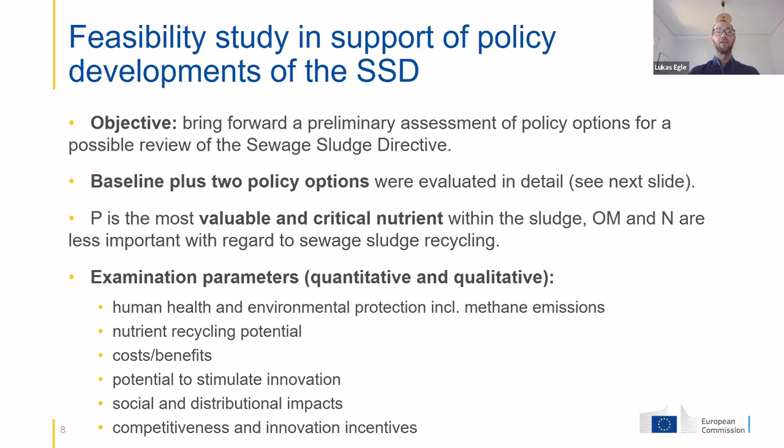The parameters we had a look at included some quantitative parameters, but also some qualitative. We looked at the effects on human health, environmental protection, some gas emissions as well, like methane, the nutrient recycling potential, what are the costs of certain policy options, the benefits, how could we stimulate innovation, what are also the social impacts, for example on job creation, and also the competitiveness of the European Union and innovation incentives.

When we talk about the objectives, it's always very important, objective A, to have this environmental and health protection when we spread sewage sludge on agricultural lands, and then also be in line with objective B, to be in line with current circular economy principles, but also zero pollution.

So we were looking at different scenarios. On the one hand, there could be a possibility to monitor sewage sludge quality, control it, and then apply more sewage sludge on agricultural lands. Or there could be an option to ban sewage sludge for recycling, so the direct application of sewage sludge for recycling, unless we have a specific treatment.

In the last years, new technology arose. For example, the sewage sludge is incinerated, and then from the sewage sludge ash you can produce fertilizing products which have total different characteristics in the sense of quality, removal of pollutants, and availability for the plants.

So what we did, we targeted these phosphorus recovery goals on different sizes of wastewater treatment plant. So if we had a look, for example, if we would implement it at wastewater treatment plants greater than 20,000, greater than 50,000, greater than 100,000, and greater than 500,000 population equivalents, to have also a certain sensitivity analysis and see the effects, depending on what size we consider in our study, what would be the effects on the parameters I discussed before.

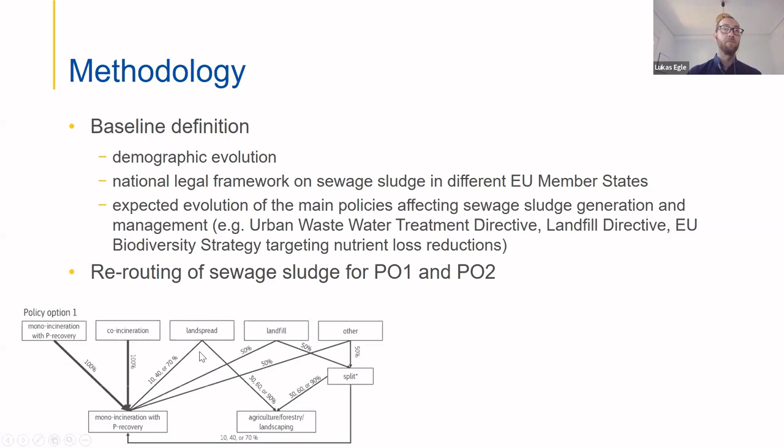For example, when it's currently land spread, we considered that some sludges have good quality. Most of the sludge has good quality, so 90% could go to agriculture, forestry, or landscaping. But there could be countries where only 60% or 30% is good quality. So we also made a sensitivity analysis within the policy option.

The other part, which has bad quality sewage sludge, is then going for mono incineration with phosphorus recovery. And for policy option 2, mainly all of the sludge that is currently used otherwise, like co-incineration, land spread, landfilling, or other, is going to mono incineration, meaning you only incinerate the sludge without any other waste, and then go for a technical phosphorus recovery.

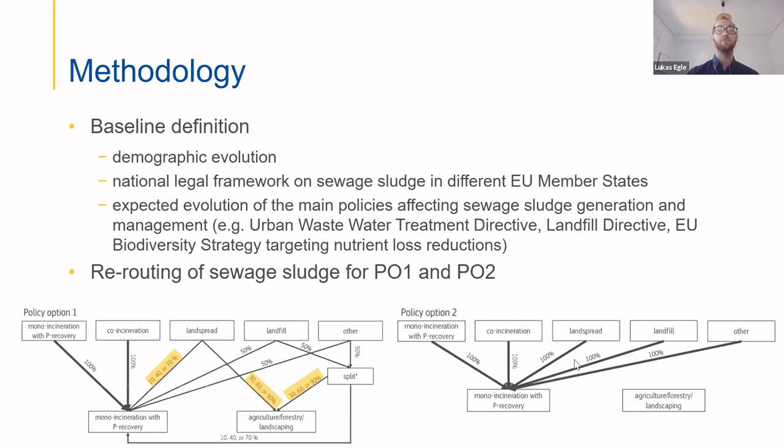And I directly want to jump to the results we are having. This is quite interesting for me to show you the baseline scenario, but also situation 2019.

Then with arising technologies to recover phosphorus from the sewage sludge ash, we assumed here that the sewage sludge that is already mono incinerated will also go for a technical phosphorus recycling to produce a fertilizing product.

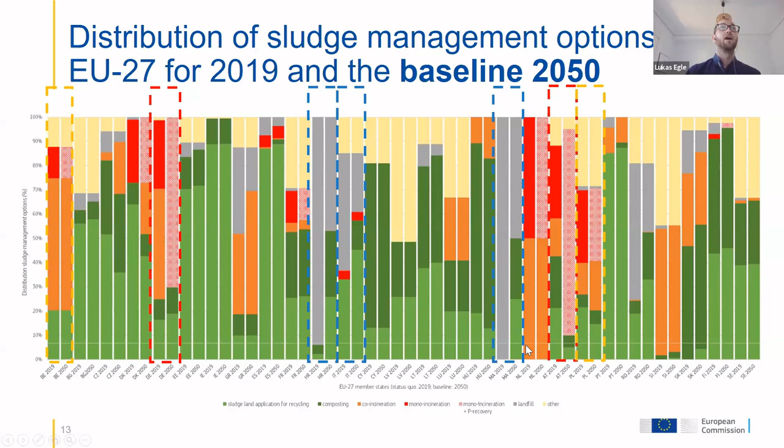And when we look at the different policy options, when we talk about sewage sludge management options, one of the main findings for us is when we talk about mandatory P recovery from wastewater treatment plants, we see that this could be a sound assumption that the sewage sludge from wastewater treatment plants greater than 50,000 population equivalent could be going, or should be considered, because with this 50,000 threshold, we cover 70% of the wastewater that is occurring in the EU27, but we only address 12% of the wastewater treatment plants.

So you have a great amount of wastewater or phosphorus you're considering, but the regulation or the policy options applies only for about 10% of the wastewater treatment plants, and is also for sure affecting the cost and whatsoever.

So in the upcoming slides, I always want to present here the results for the wastewater treatment plants greater than 50,000 population equivalents. And what we see here with regarding the sewage sludge management options, we see here for policy option 1, we have a higher rate of direct agricultural sewage sludge application. This is quite clear compared to policy option 2, because in policy option 2, we go for the incineration route with technical P recovery, and also quite obvious with policy option 2, you go for more mono incineration and with the targeted phosphorus recovery.

And we see now on the next slide the effects, for example, on the P recycling, but also the environmental effects. In general, we see with these mandatory recycling rates, for sure, more phosphorus will be applied to agricultural lands, both at the same order of magnitude for both policy options.

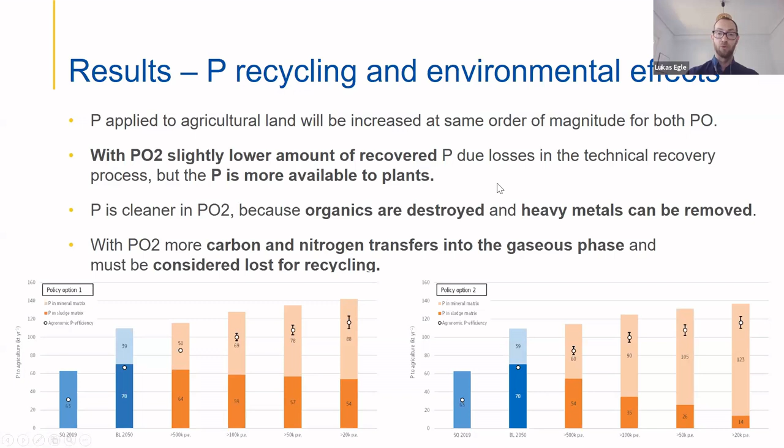But we have here the trade-off, as I already mentioned before. If we have more incineration, we lose carbon and nitrogen. We transfer it to the gaseous phase, and this will be lost for recycling in the European Union. But more critical, I want to remember, is the phosphorus when we talk about the sewage sludge.

When we talk about methane emissions, the reduction of methane emissions is similar for both policy options. This is mainly the reduction because we distribute with a different distribution, because we avoid the landfilling. So already the methane emissions from sewage sludge in general in the European Union is low from the landfills, but bringing less sewage sludge due to different policy options, we have an additional decrease of methane emissions by avoidance of bringing sewage sludge to landfills, which is also good for the climate.

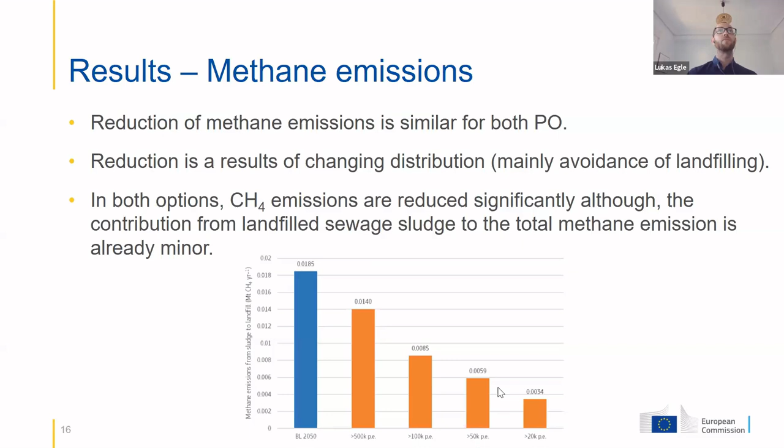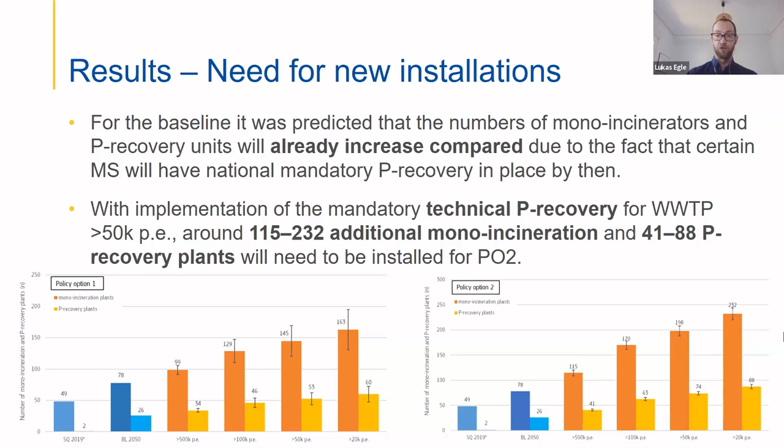If we have this mandatory phosphorus recycling with these new policy options, we need new installations. In both policy options, some countries already have mandatory P recycling targets, meaning we'll see an increase of mono incineration plants and P recovery units already in the baseline scenario. But implementing mandatory technical phosphorus recovery for wastewater treatment plants greater than 50,000 population equivalent, for example in policy option 2, will require 115 to 230 additional mono incinerators in the whole EU27, and about 40 to 90 new phosphorus recovery plants, normally installed directly at the incinerator or at a central point in the country. So there will be significant new installations for burning sludge and for recovering phosphorus, more so for policy option 2 than for policy option 1.

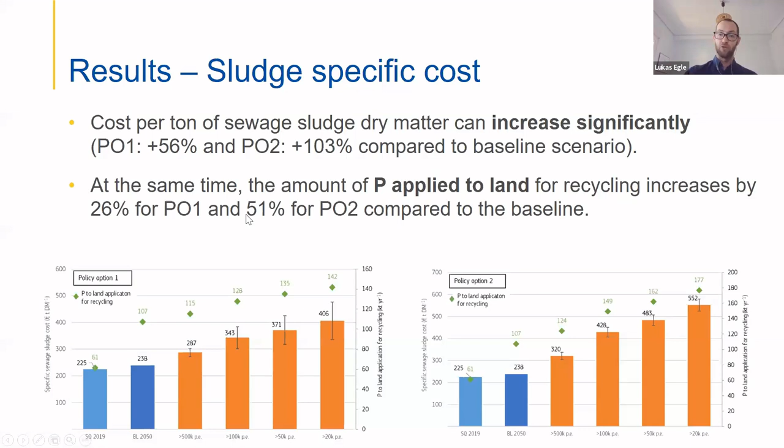When we talk about costs, there's already a small increase in cost per euro per ton dry matter of sewage sludge in the baseline scenario. But if you apply policy option 1, the cost will increase by about 50 to 60%. If you go for a technical solution, the cost per ton dry matter will increase by 100%, while having, for example, only 26% more phosphorus applied to land, or 50% with policy option 2. So the cost per ton phosphorus will also increase significantly.